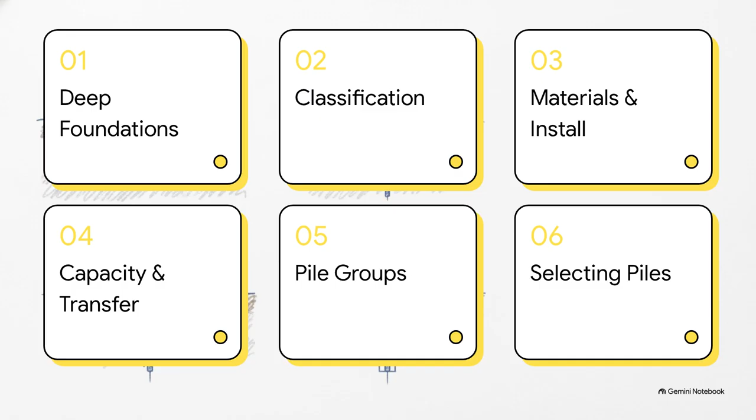pile foundations. Okay, here's our roadmap for today's explainer. We'll start with the deep foundation solution, then look at classification by function, materials and installation, load capacity and transfer, the power of pile groups, and finally, selecting the right pile. All right, let's jump right into Section 1, the deep foundation solution.

This really brings us to the ultimate engineering challenge that builders have faced for centuries. How does humanity build massive structures on weak, soft soil without them just completely sinking? I mean, when an engineer arrives at a site and the surface soil is incredibly soft or loose, a standard shallow foundation just isn't going to cut it. If you try to place heavy loads, think bridges or multi-story buildings, on that kind of ground, excessive settlement or even total collapse is practically guaranteed.

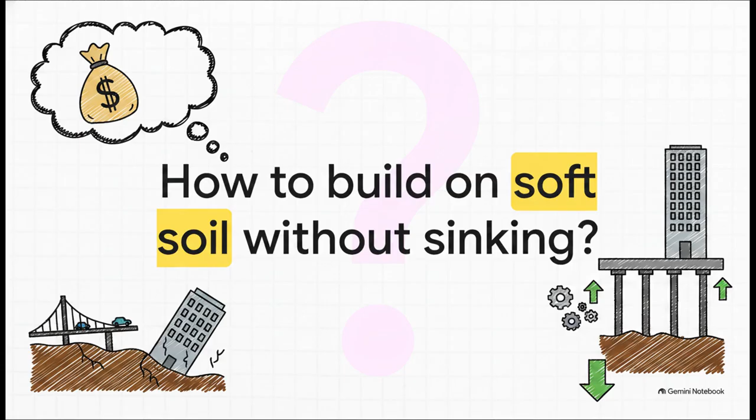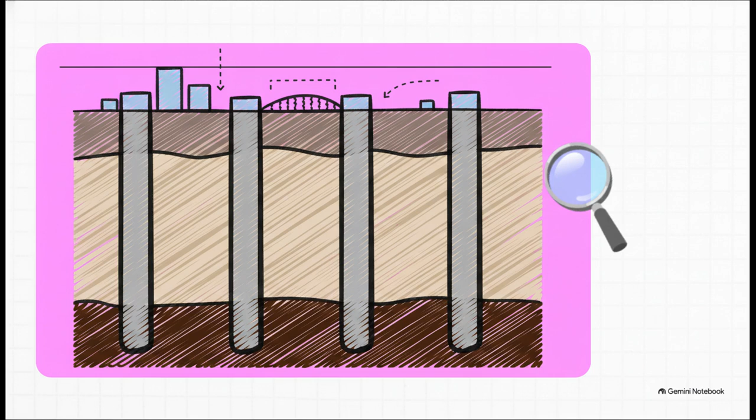So what's the fix? You have to go deep. Enter the hero of our explainer, the pile foundation. Think of piles as incredibly strong, long, slender members, basically underground stilts. Their main job is to just bypass those problematic, weak soil layers near the surface and reach all the way down to transmit those heavy structural loads directly into the much firmer, harder strata located deep below the ground.

You can really see how a pile acts almost exactly like a structural column. It literally drives right through that upper weak soil layer, completely ignoring it, just to find a solid, immovable footing on the hard stratum way down below. It's a super elegant, simple concept, but the engineering behind it is absolutely precise.

Now, what I absolutely love about this is that it's not some brand new idea. The history here is staggering. We're talking 12,000 years ago. Neolithic inhabitants in Switzerland were driving wooden poles into the soft bottoms of shallow lakes just to elevate their homes above the water and away from predators.

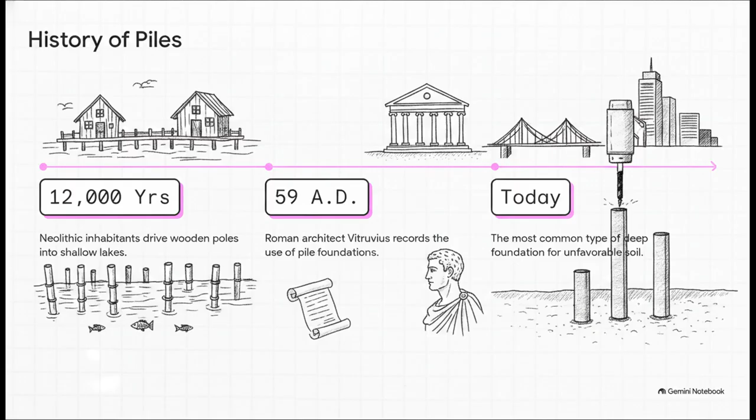Fast forward a bit to 59 AD, and the legendary Roman architect Vitruvius officially recorded the use of pile foundations, and today, they remain the single most common type of deep foundation used globally whenever soil conditions are just not cooperating. Moving on to Section 2, classification by function.

So now that we know what they are, we can actually classify piles by how they transfer their load into the earth. And there are two main methods here. The first is end-bearing piles. Just like that concept we talked about a second ago, these transfer their load directly through the very tip of the pile to a hard, suitable bearing stratum underneath the soft soil.

The second method involves friction piles. These are used in really deep, homogeneous soils where there just isn't a hard, rocky bottom nearby. Instead, they transfer loads into the surrounding material via skin friction along the entire surface area of the pile shaft, kind of like holding onto a pole. In reality, though, almost all piles develop a combination of both end-bearing and skin friction, but they're classified by whichever method is doing the actual heavy lifting.

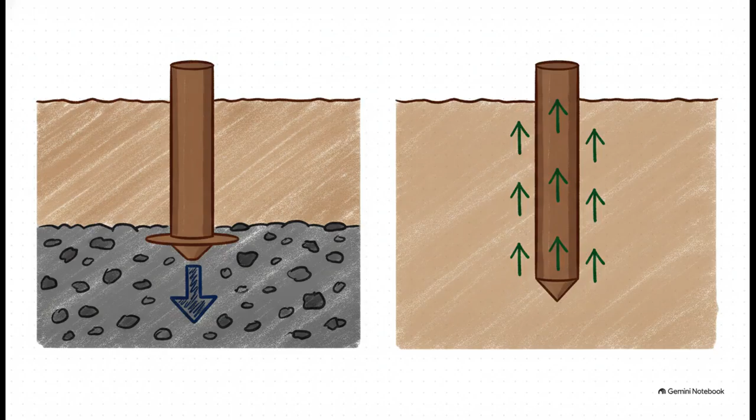But wait, it doesn't stop at bearing downward weight. Piles are incredibly versatile. You've got tension piles, which actually resist upward forces, like keeping a buried tank from literally popping out of the ground because of groundwater pressure. Then there are compaction piles, which don't even carry a load. They're just driven in to compress and strengthen loose granular soils.

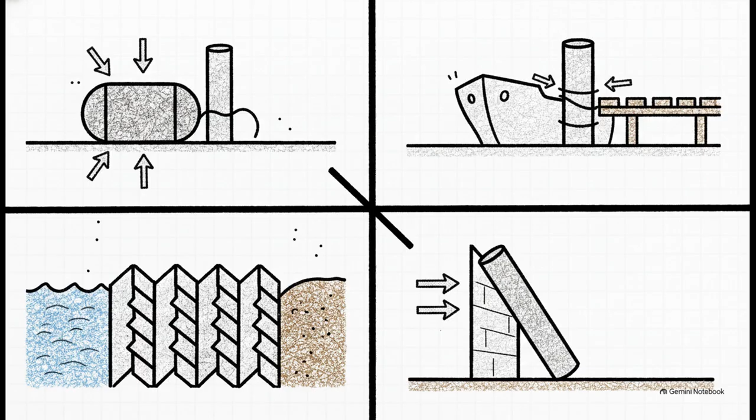We've also got anchor piles against horizontal pull, fender piles acting as massive bumpers to protect waterfront docks from docking ships, and sheet piles that interlock to hold back water seepage. Oh, and if you need to resist horizontal forces, engineers use batter piles, which are actually driven in at an angle. Okay, Section 3, materials and installation.

So the choice of materials strictly dictates the maximum design load. Take steel, for instance. Using rolled H-shapes or really thick pipes, it can handle massive loads of over 1,000 kilonewtons. That is upwards of 100 metric tons. Timber is fascinating too, because it performs beautifully if it's either entirely dry or entirely submerged in water. But if the water table fluctuates and that wood alternates between wet and dry, it rots. That's exactly where composite piles come in.

You can use untreated timber for the permanently submerged lower half, and then top it with concrete for the part that projects above the water table. Pretty clever, right? So once you've picked your material, how does it actually get into the earth?

Well, the first method is straightforward but requires some massive dynamic energy. Driven piles. Using heavy drop hammers, steam hammers, or vibratory equipment, these are literally pounded into the ground. The second method is cast in situ. This completely eliminates the intense vibration of driving. Instead, holes are carefully drilled into the earth and then filled with fresh concrete right there on site.

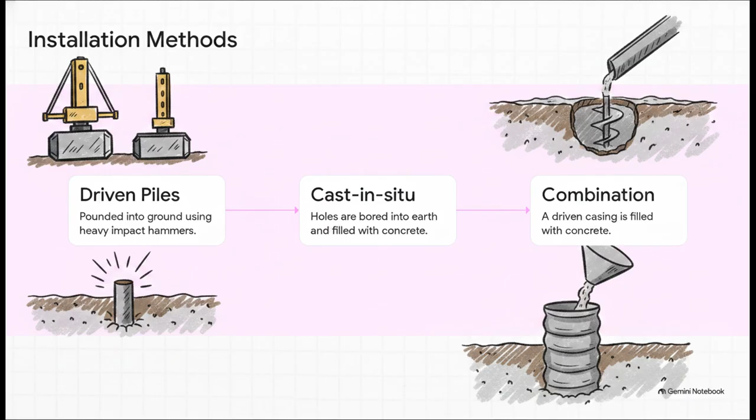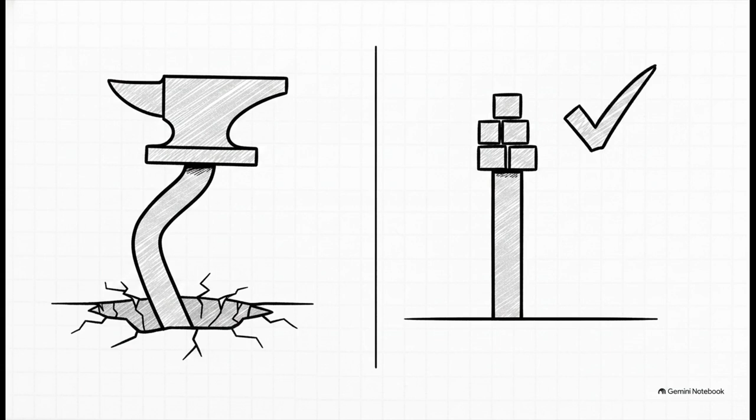And finally, there's a combination method, like the famous Franki pile, which uses a driven outer shell or casing that is then filled with concrete. Let's roll right into Section 4, load capacity and transfer. With our piles finally in the ground, we now need to figure out how much weight they can actually hold safely. The totally crucial point here is establishing what we call the ultimate bearing capacity.

Simply put, this is the absolute maximum load the pile can handle before the soil fails or settles excessively. But of course, engineers aren't going to load a pile right to its breaking point. They take that ultimate capacity and divide it by a strict factor of safety to find the allowable load. This guarantees an adequate safety margin against catastrophic settlement.

Now, figuring out that capacity is a pretty rigorous process. Engineers use static analysis, applying these complex theories from experts like Meyerhof and Vesic. They also use dynamic analysis, plugging data into formulas like the Engineering News formula. But one of the most fascinating techniques? That has to be the wave equation method.

When a massive pile hammer strikes the top of the pile, it actually sends a stress wave down the entire length of the column. Engineers apply wave transmission theory to this exact impact energy to calculate the pile's load-bearing strength. It's wild stuff. But, despite all this advanced math, the single best, absolutely foolproof approach is simply conducting physical load tests right there on the construction site.

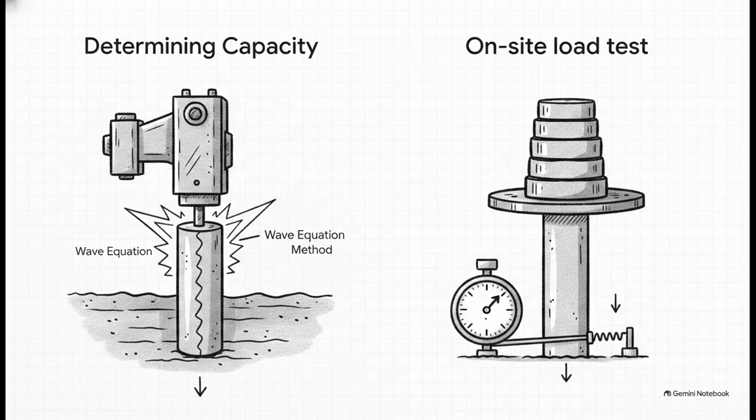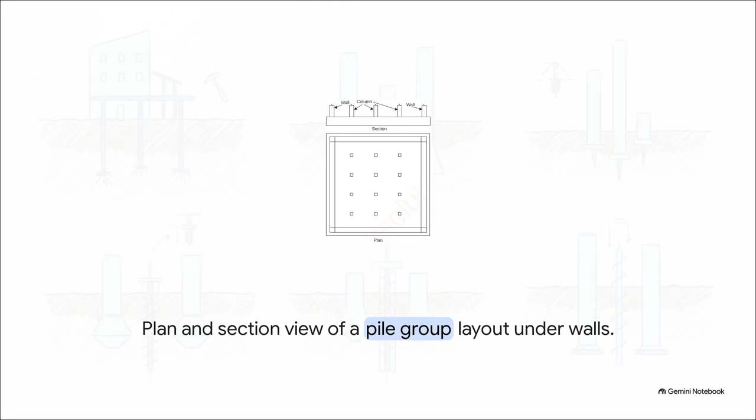All right, Section 5, the power of pile groups. So rarely does a single pile support a structure all by itself. Normally, individual piles are strategically arranged together in a grid under the footprint of a building. They're then tied together at the surface by a really thick concrete slab, which is called a pile cap. This makes sure that the heavy loads coming down from the columns and walls are distributed super evenly across the entire group of piles.

But here's a really surprising dynamic about pile groups. You might naturally think that if one pile holds 100 tons, a group of 10 piles holds 1,000 tons, right? Well, that is actually rarely the case. We have to calculate something called group efficiency, because driving piles actually disturbs the surrounding soil, and because the stress zones of closely spaced piles overlap deep underground. The total capacity of the group is usually less than the sum of its parts. In fact, in soft clay, an entire group of piles can actually fail together as one giant block. So engineers have to carefully calculate pile spacing to mitigate all this overlapping stress.

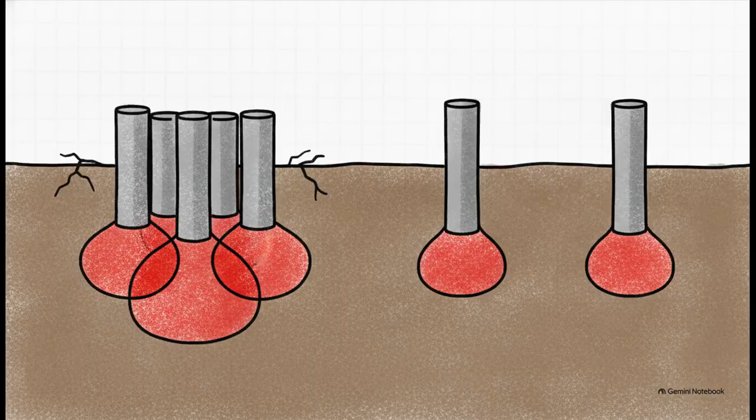Which brings us to our final part, Section 6, selecting the right pile. Synthesizing all this theory into the ultimate engineering decision, actually selecting the right pile, requires evaluating some incredibly strict criteria. Engineers have to look at the exact structural loads, the deep soil profile, groundwater conditions, and even just the local availability of heavy equipment and time. For bridges, they also have to consider the flow of water and potential scouring of the riverbed.

But here's a really fascinating caveat for you. Piles are not always the answer. Sometimes, a naturally firm soil layer sits right on top of a soft, deep layer. Driving piles into that firm top layer can actually punch through and break it up, destroying its natural ability to act as a supportive mat. This concentrates the stress right into the soft clay below, causing the exact sinking you were trying to prevent. Engineering is really all about knowing exactly when and how to apply the right tool.

So next time you're walking through a dense city looking up at a massive skyscraper or driving across a towering bridge, take just a second to look down. Ask yourself about the vast, hidden infrastructure of driven steel, poured concrete, and ancient engineering principles holding it all up from below. It's truly amazing when you think about it.